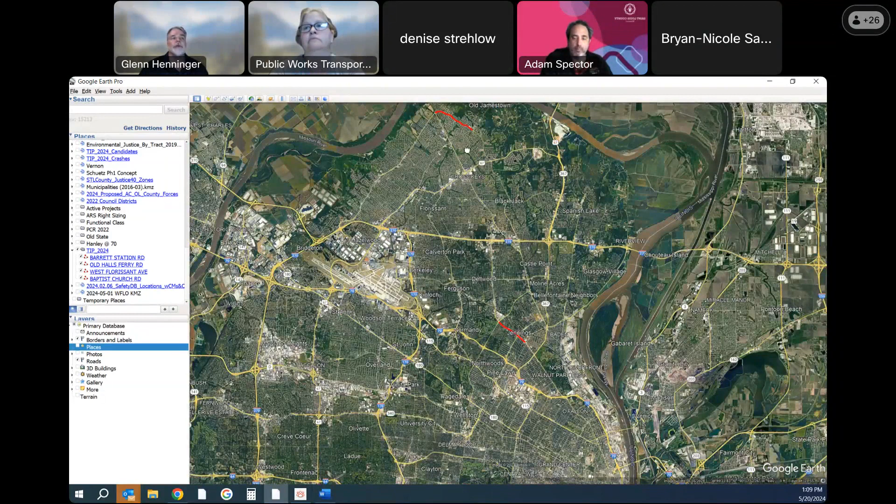And then the one project we did receive that has significant great streets components to it, it's on Old Halls Ferry Road, far North County. This is from the roundabout at Old Halls Ferry and Vale. If anybody's familiar with that, it's been in place almost a decade now.

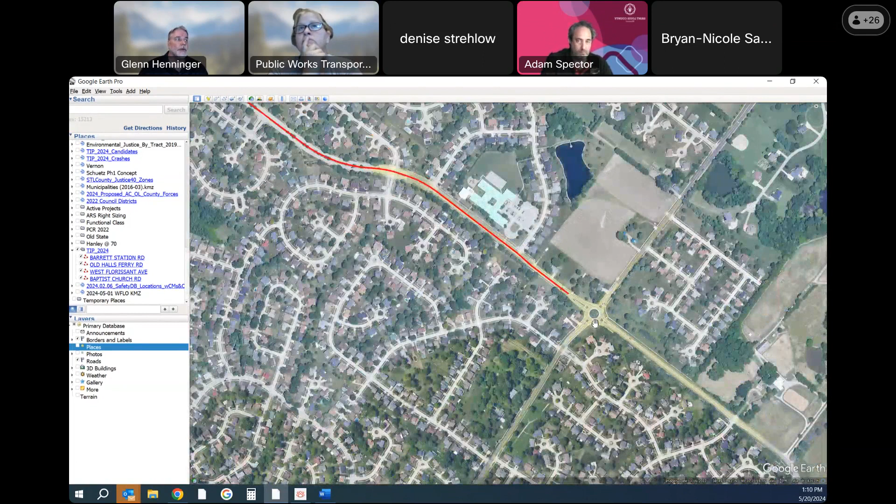It used to be a four-way stop, converted to a roundabout. As far as we know, it's been doing okay. Haven't heard any complaints. And then to the north of there, probably 3 decades old worth of a lot of residential development. Very built out area.

Our predecessors at the time of all that development had the developer build Old Halls Ferry as a 4-lane median divided boulevard type roadway. You can see the pavement needs in this street view, and that was just random. I didn't pick this particular location.

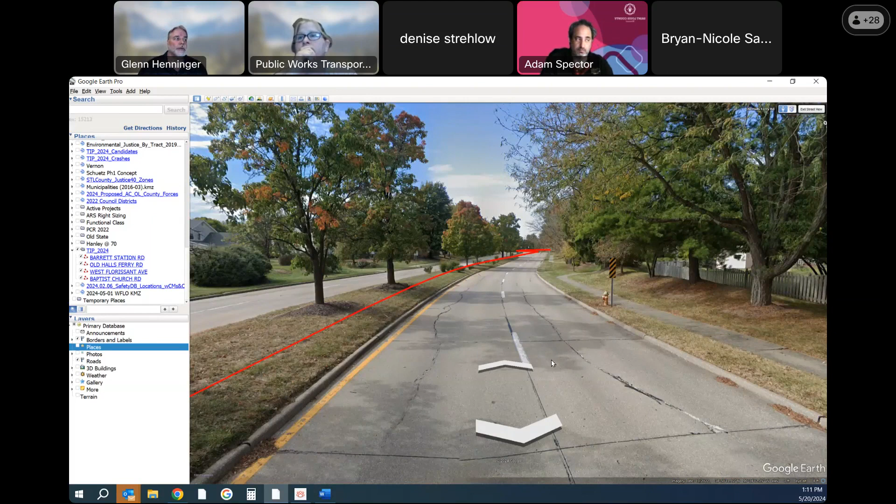What we have found is that they overestimated the amount of traffic all these homes would generate. The daily traffic is less than half of what would be needed for 2 through lanes in each direction. So what we have programmed is to reallocate the curb space for bikes. We're going to stripe it for 1 through car lane in each direction.

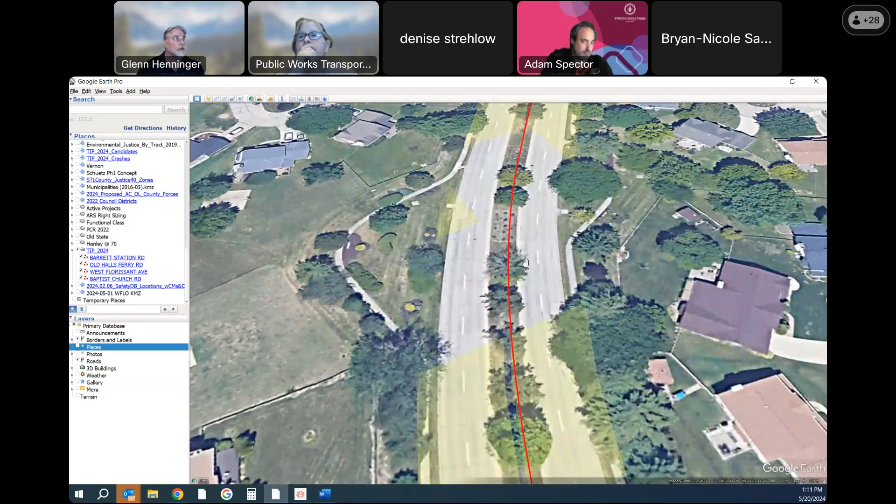It already has median breaks and left turn lanes at the side street intersections, so that's not an issue. And we fully expect it to run very well, traffic level of service wise, and should be a lot safer and slower.

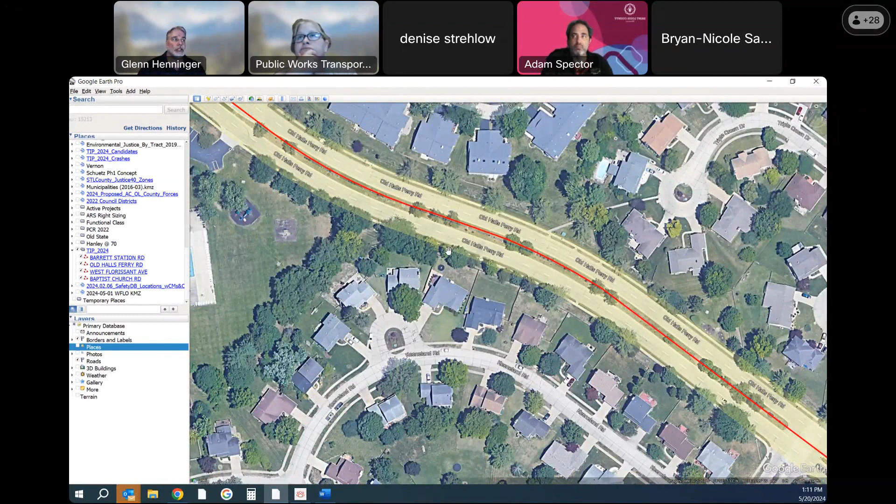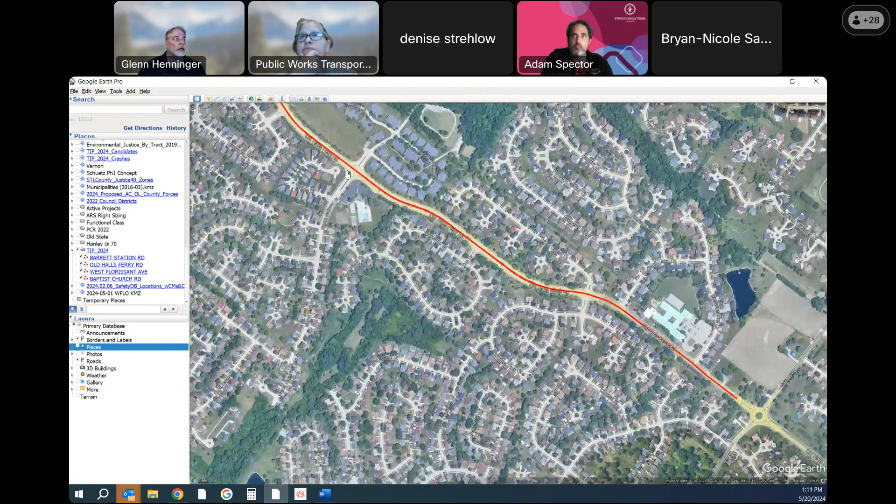That road that I pointed to the south end at the roundabout will go all the way up close to New Halls Ferry Road. We do have to open back up somewhat before that intersection, because large changes like this have to end somewhere, and that intersection is set up with a lot of extra space as well. We don't have good plans for how to continue the bikes from there. New Halls Ferry Road already has bike lanes, so that's not too much of an issue.

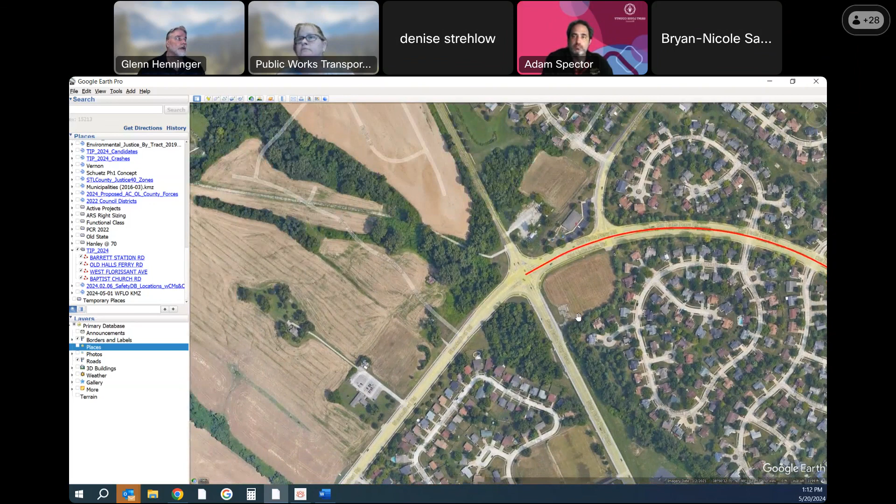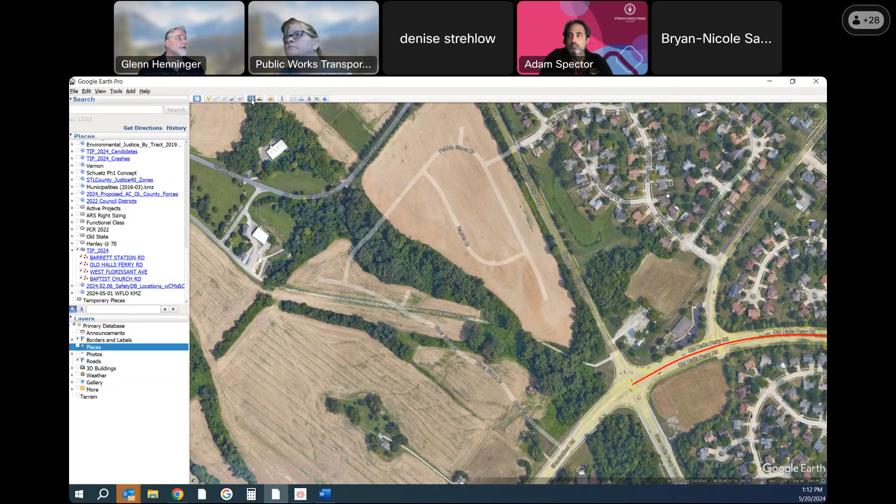Traffic wise, Shackelford and New Halls Ferry Road may have a little extra capacity where we might consider doing something similar in the future. However, if you look here, these white lines depict a new road of one of the final large tracts to be developed. That really doesn't show up in the current views on Google Earth, but if you turn on historical imagery, that brings up the latest image, and you can see where the subdivision is starting to take shape.

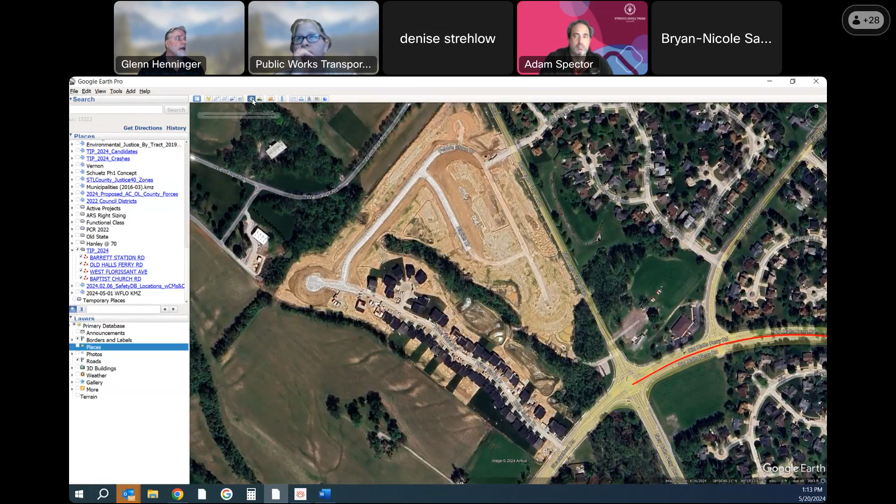And then north of that subdivision is a Boeing retreat, if anybody's familiar with that. It's gone unutilized for a long time. That has recently been sold to a Catholic university. Traffic patterns and volumes may change somewhat in the future in this area.

I don't see a whole lot of these new developments using Old Halls Ferry, so I'm still very confident it will be fine with 1 through lane in each direction. But Shackelford and New Halls Ferry, their traffic patterns may change, so we'll have to keep an eye on that.

This usually takes a little longer. We usually have more than 4 projects to talk about. So I will open that up for any questions on those 4.

And Misty, you may have to keep an eye out. I don't know, I don't remember if people are automatically muted. Correct. If you have any questions, you can put them in the chat and we'll be happy to answer them for you, or any feedback for that matter.

All right, so one thing that we had planned to fund all 9 of those projects. We had it in our budget. They were picked to fit within our budget. Since we only got 4 of them, that does open up some of our budget, which is good news for the next part of this presentation, as we will definitely be trying to make some use of upcoming funding.

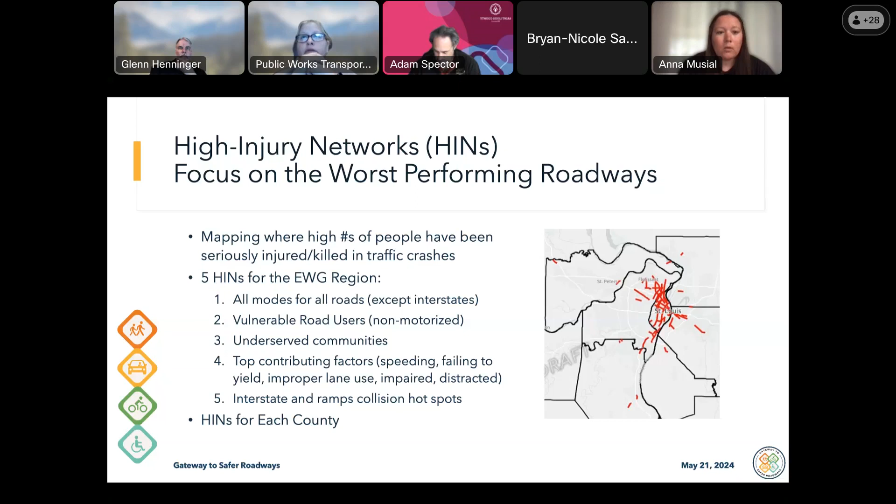On top of our regional high injury networks, we also created high injury networks for each of our counties so that they can look specifically at their county to see what can be done on their own networks. This is just a sample of an early screenshot of our high injury networks.

I didn't have time to get the most updated one, but the red on this map shows where the top 10% of our fatal and serious injury crashes are happening in this region. The orange is the top 25%, and the yellow is the top 50%. In our current map, we took the blue lines off since they showed the bottom 50%.

Some of the data behind it, we just didn't really like how it was working, so we took the blue lines off of our regional maps, but we left them in our county maps. When our plan is final, we'll be putting this regional high injury network on our website so the public can access and use it.

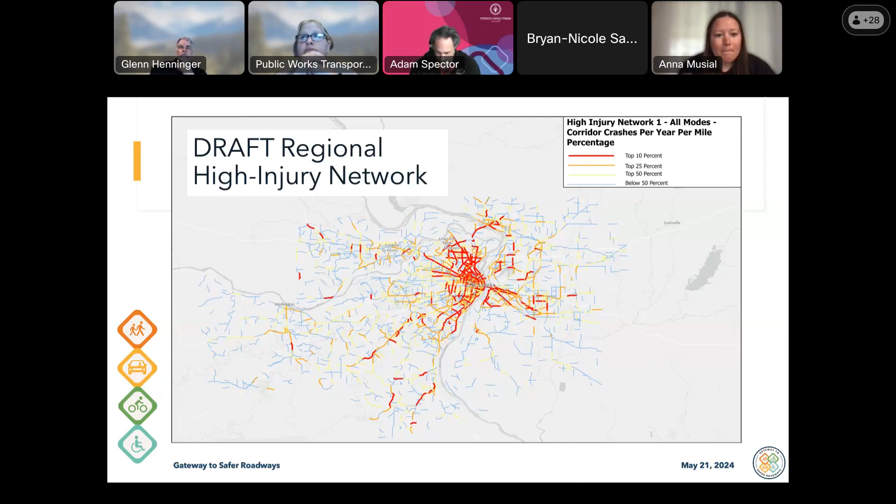We dove a little deeper into the crash data and looked at systemic treatments that our locals could deploy on their systems to help reduce fatal and serious injury crashes. We identified high-risk roadway characteristics and what countermeasures could lower those risks. We also focused a lot on intersections, roadway departures, VRUs, and speed management, and many of these countermeasures are part of FHWA's proven safety countermeasure list.

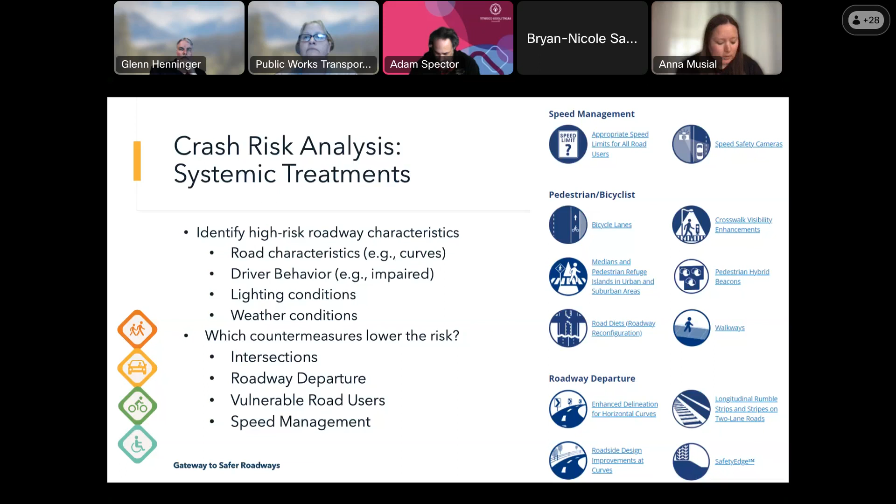The last component of our plan was the policy review. We identified 9 policy programming needs and opportunities for our region, listed in no particular order: speeding, seatbelt use, helmet use, distracted driving, impairment, red light running, bike ped safety, unlicensed drivers, and roadway departures.

To help address those 9 needs and opportunities, we came up with 16 policy and program recommendations, divided into 4 categories: safe road users, safe roads, safe vehicles, and enforcement.

I'm not going to go through each of those for the sake of time, but we took all 16 of those recommendations and mapped them out against our 9 areas of needs and opportunities, to show that just one of these recommendations could possibly hit all 9 of our needs and opportunities. So we can really address a lot of our issues by doing just one or two of these programs or policies.

We also wanted to make sure we addressed the great work already being done in our region and try to build on it. For example, in St. Louis County, the city of Kirkwood had already completed an action plan and is doing supplemental work for it. Webster Groves is also going to be developing an action plan — they received SS4A funding last round.

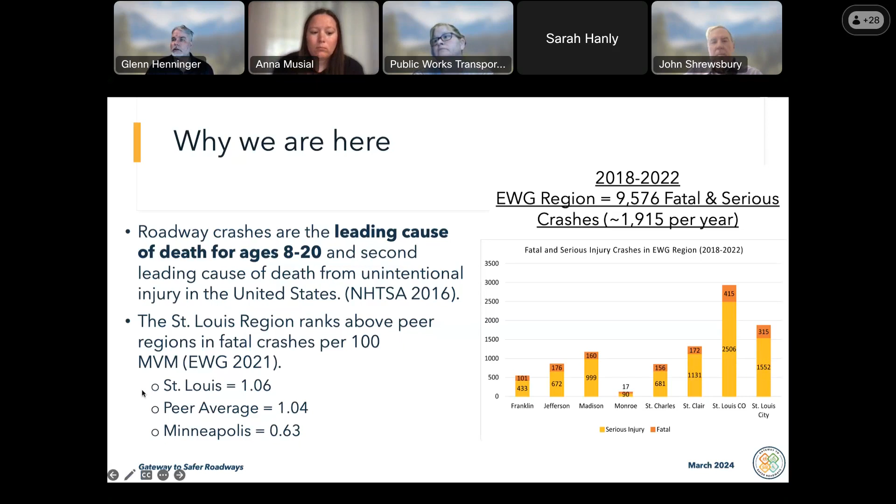For all of our crash data, we used crash report information — any data we got was collected from crash reports, and that includes the vulnerable road user data. So I wonder if you're capturing the cyclist and pedestrian crashes — are they reported? The only way we can analyze it is if it's reported. Unfortunately, I know a lot of them are not being reported, but there was really no way for us to do otherwise — we had to have a common way of looking at all crash data throughout our whole region, by state and by county, though by state is the hardest part, but we had to have something we could relate back to, and that was the crash data.

So who reports crash data? The police reports — so if police don't show up to a scene, then it doesn't get reported.

And my experience with the police as a cyclist is that I don't know anyone who's ever been in a crash where a car has been ticketed. So it strikes me that their attitude is it's a no-fault collision.

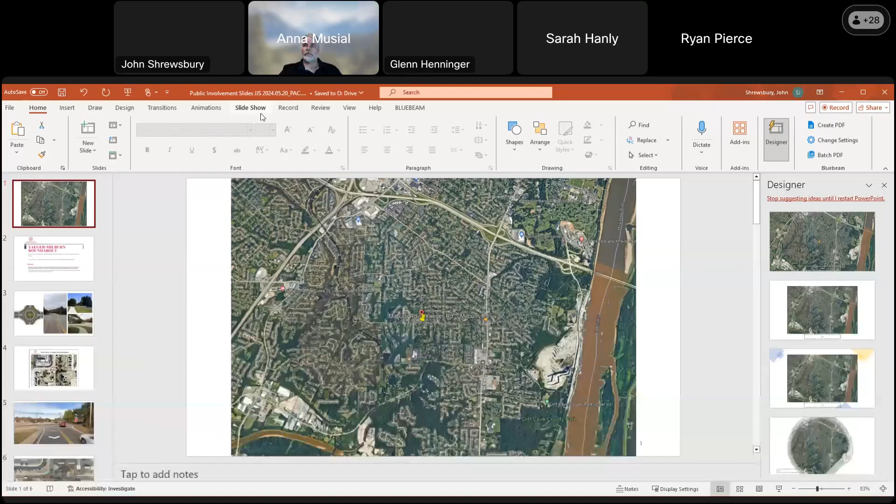Is that better? The Yeager-Milburn intersection is in South County. You can see highways to the north, that's 270. On the west side is I-55. You've got the Mississippi River to the far east, and the Meramec River down in the corner. Yeager-Milburn is in the southeastern part of St. Louis County, near Oakville High School, just north of the high school, and there's another elementary school right on the corner.

Over the last few months, since our last meeting here in November of '23, we've had quite a number of design projects with public involvement and public engagement meetings. On Yeager-Milburn in particular, we've had at least three meetings with the public—some with the school, the property owners, and the general community—since last November. Then just last Monday, we had another public meeting and presented this project to them again.

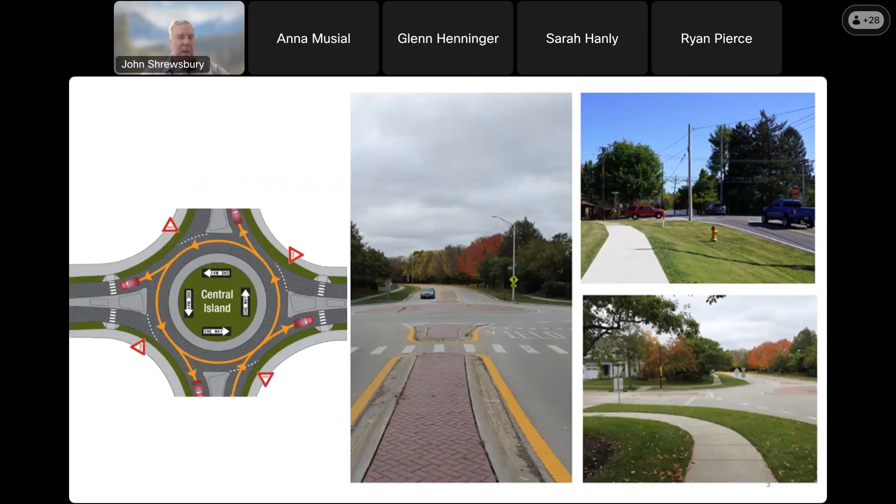There, at this intersection—this is just a generalized roundabout photo I'm showing right here. You may be familiar with them, but I don't think the concept is very familiar to the folks down in South County. They're not quite accustomed to these things, and that was a big reason why we've had a couple of public meetings with them to help explain.

At this intersection, there were 48 crashes with 10 injuries in the time period of 2017 to 2020. The county got some federal funding through East-West Gateway—congestion mitigation and air quality, CMAQ funding—to help improve the operation of traffic at this intersection, at this location. So, like I said, we had the meeting last Monday night.

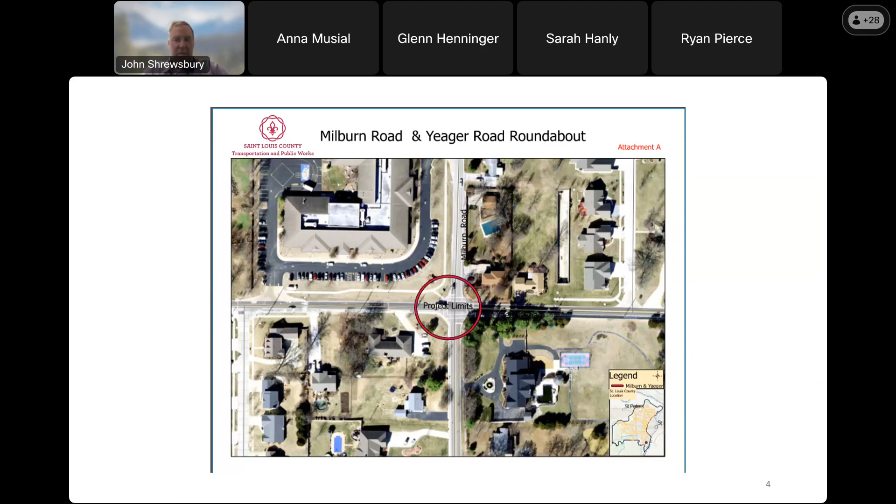There were around 120 to 140 folks at the meeting. We talked about this intersection and showed them a lot of graphics on it.

We gathered comments from everyone that attended. There was about 61 that were against the idea of a roundabout, 25 in favor, and 4 that were somewhat indifferent to it. Our councilman Trakas down in South County has asked that they provide feedback, noting that it is totally up to them if they want to proceed with this project or not.

It's a proven concept. It improves safety quite a bit. It reduces the number of conflict points between vehicles as well as pedestrians, and improves safety quite a bit over what we have now, which is a 4-way stop controlled intersection that is routinely disobeyed. And therein is the problem.

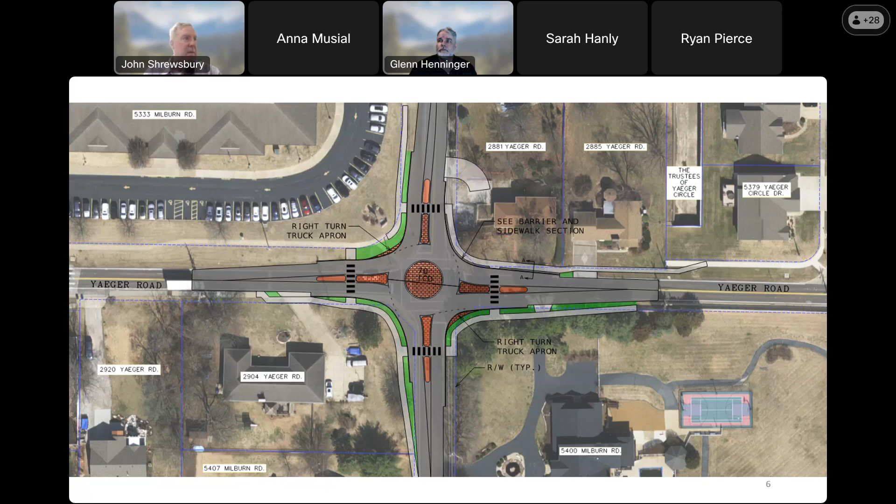There were a couple questions in the chat, John. You could address those, please. Trying to get back to my screen. Sorry. No, you're fine. And if, for that matter, I can just read them to you if you'd like.

The question comes from Jason Hartsfield. Are you going to use any kind of barrier to keep pedestrians from just walking through the roundabout? Because they will absolutely do that.

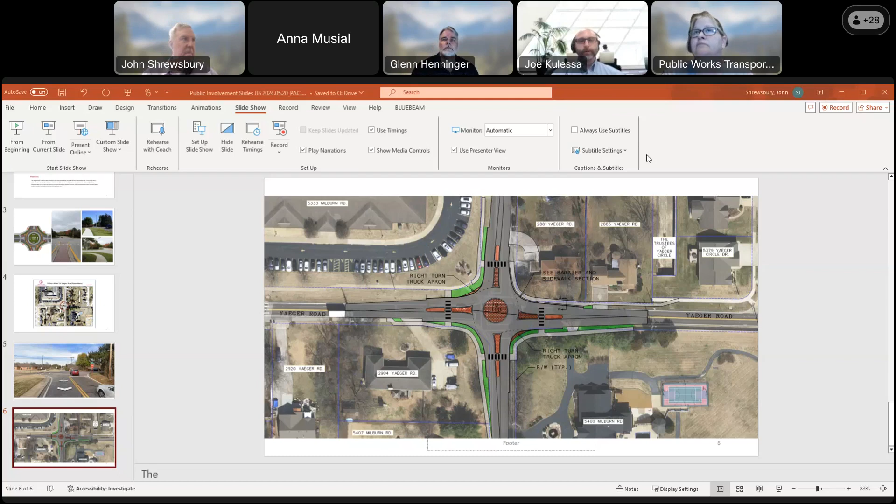Hey John, I'd like to suggest Joe chime in, I think he's a little more familiar with the latest design. Sure. Thanks, Glenn. So in this particular roundabout, there won't be a barrier that keeps pedestrians from walking in locations other than the crosswalk. But realistically, that is going to be the case with any roundabout.

However, we are introducing raised crosswalks with this design to slow vehicles as they approach, and this is actually a mini roundabout design. The center island is designed such that school buses can get around it without driving over the island. But if we had a large delivery truck or tractor trailer, they can still navigate the intersection as they do today, but they will have to drive over the raised center island that's in the roundabout. So that's an answer to both of the questions that were just posed.

Todd Antone asks, what happens next if the public vote is against the roundabout? The project will be canceled, unfortunately. We will look at some of the considerations that have been brought to us by the public and make a determination as to what we do next. I don't have a definitive answer to that yet. What I do know is that the federal money will no longer be available. And this intersection, as we move forward for safety funding, while it does have a high crash rate, it does not rank on the new East-West Gateway Vision Zero model as a high injury network location. So it most likely will not be pursued with the same size of program if we go to look at something else.

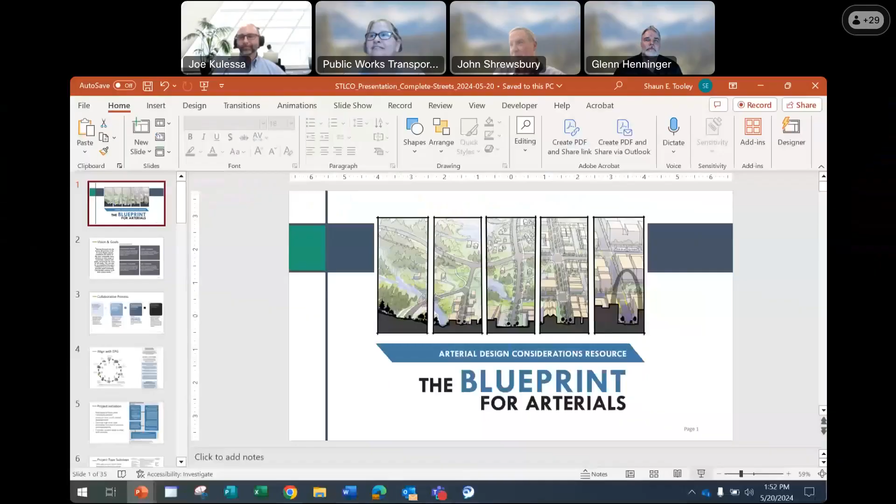Thank you, Shaun. Hello, Shaun Tooley, Missouri Department of Transportation. We at MoDOT have been working with East-West Gateway on this new resource for the region. Several folks on the call, like John Shrewsbury, Joe Kulessa, Glenn Henninger, have been involved, also Ray Golick. This new resource will be done in the next month.

It's effectively a design guide, but it's actually more than that. We can't call it a design guide because we're not replacing the Engineering Policy Guide. We're supplementing it. It's a resource to help governments like St. Louis County, MoDOT, St. Louis City, et cetera—actually the 5 counties in the region—who own and operate arterial roadways like Big Bend, Brentwood, Manchester, Olive, to walk through a more detailed process during the conceptual phase.

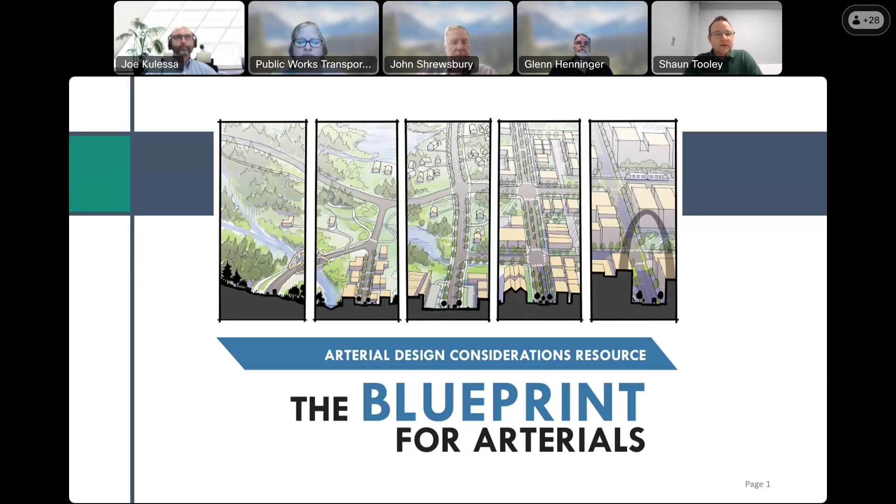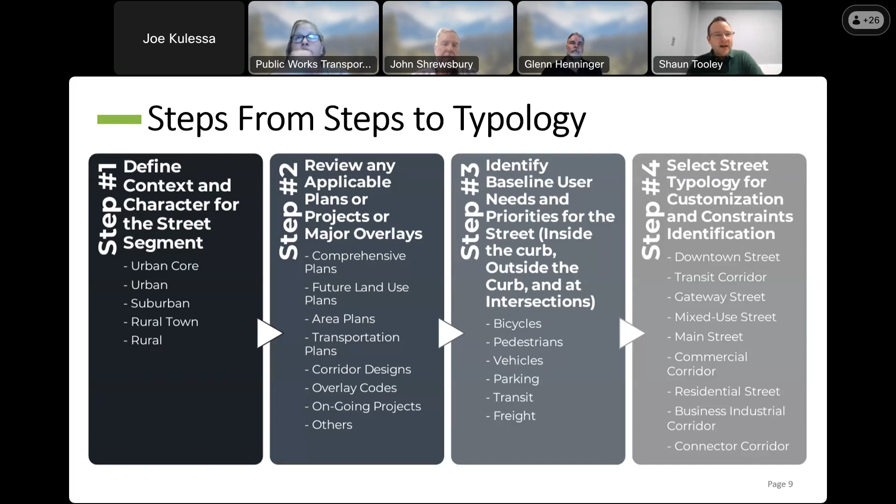And then we say, what are your existing plans? Some plans—let's say Woodson Terrace, Woodson Road wants a road diet on Woodson Road, a MoDOT roadway—and they developed their own conceptual plan for that. Well, how do we need to pull some of that and evaluate it for our agency's study of that roadway in the future? Who's our user? Those plans, your bike-ped plans, your comprehensive plan, often tell us who your users are because you have that analysis in them.

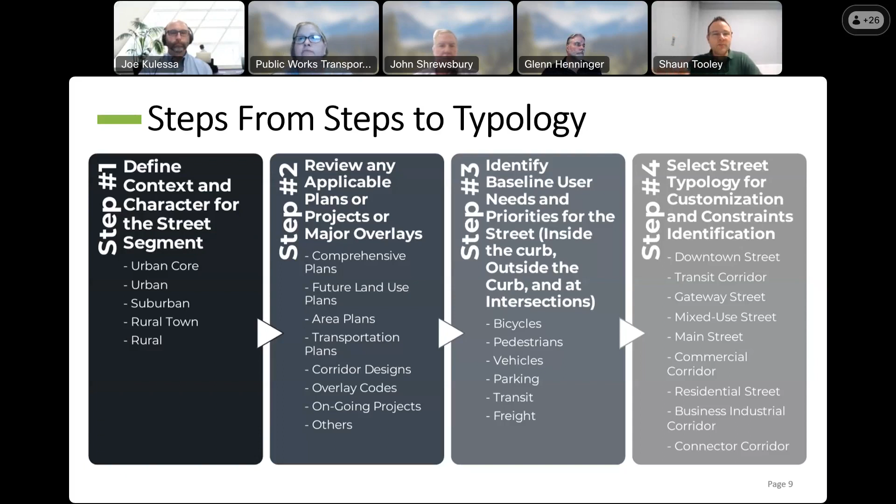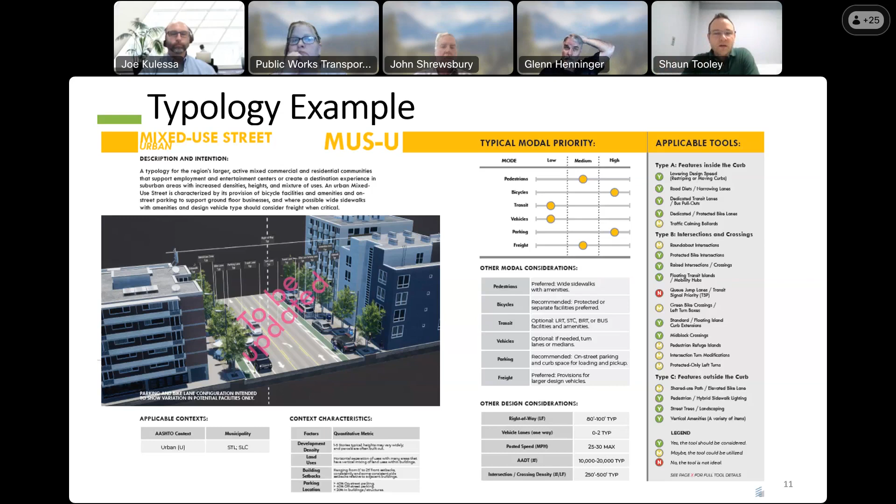For mixed use, you see red for queue jump and transit signal priority. In mixed use, you may only have 40 feet, and you have to decide who gets priority. Your highest priority is bike and pedestrian because you need that foot traffic to generate business, and with a lot of foot traffic you might need that parking instead of, say, a bus lane. So we try to give advisory guidance there, as well as who your modal priority is.

It's all the same road to us because it's Route 231, even though it has 3 or 4 names, and then it becomes South Broadway. We actually broke it out into 4 segments and said, here we can get a bike lane, here we can't for these reasons, here we can get parking on the road, here we can't. That segmentation by typology helped guide our design decisions.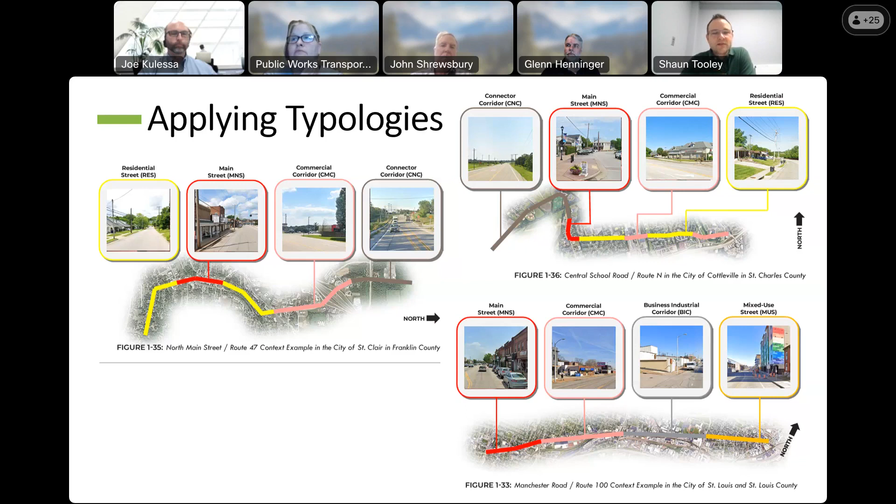And lo and behold, the public helped us through those design decisions as we were presenting the information to them.

Then the great reveal is which typology goes with which county. On the top you have your AASHTO context categories of rural, urban, suburban. On the left you have your typologies. In the cells you have the code that goes with them, as well as which county goes with them, to the best of our ability.

We actually ask you all, project teams, individual jurisdictions, to work with us and with your own folks to say, is this correct? But because we have to get this done quickly, we're not able to dissect every stretch of roadway in every county to be perfect. So project teams, as you go through the decision-making process, go deeper and debate which typology you are and which solution is a better fit for that typology.

So then we ask, what solutions are we considering? There's a bunch in this chart, and we're not going to have all of them in our design guide, so we had to pick and choose which ones are aspirational. Many of us know how to put in a center median, rumble strips, or a shared bike lane. But we might struggle putting in a roundabout, which we do, or vertical separation for a bike lane or a pedestrian refuge island - there's not as much experience doing those. We've done very few of them, if any.

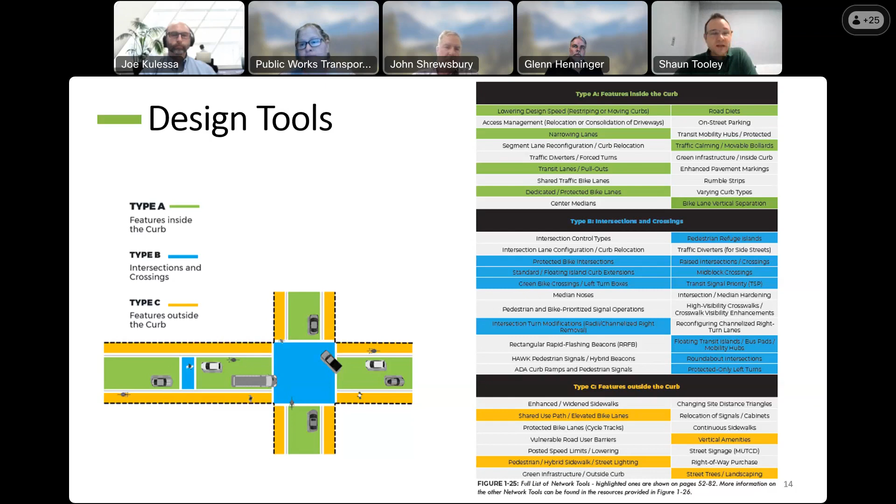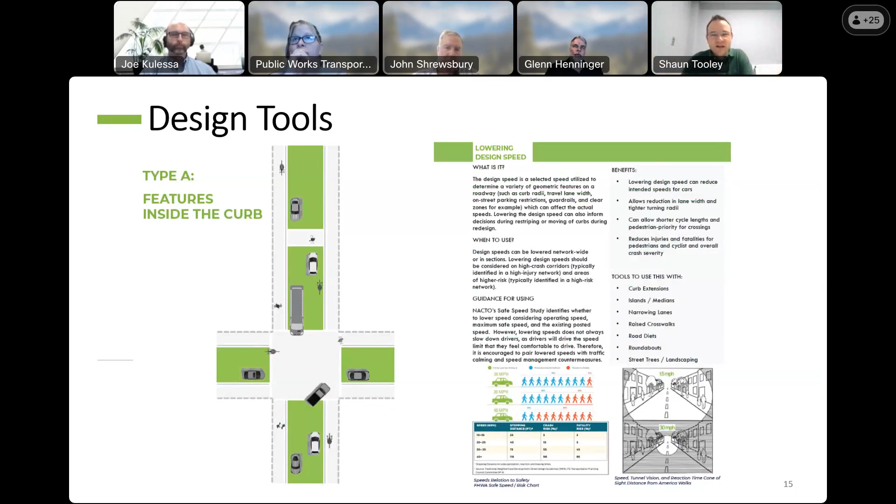So we had extra pages in the document where we put that in there so you can cut that sheet out, put it on a foam core, and take it to a public meeting, because you're not going to print out the NACTO version or the 10-page AASHTO guide version. You need just 1 to 2 pages to show them, so we created that for the aspirational solutions.

So I'm kind of skipping through a few. Yeah, use my time wisely - no more than 10 minutes.

I want to emphasize that we're all in this together. I know the roundabout in South County was just kind of poking fun, because we're all going through that right now. We've only done a few projects in this new way of doing things, and it's very much learn as you go. We've definitely had to change practices in order to see projects retained in the last few years. We don't know how we're going to roll this out yet for coming years and projects, but we now have a resource to help us make better, and hopefully safer, projects.

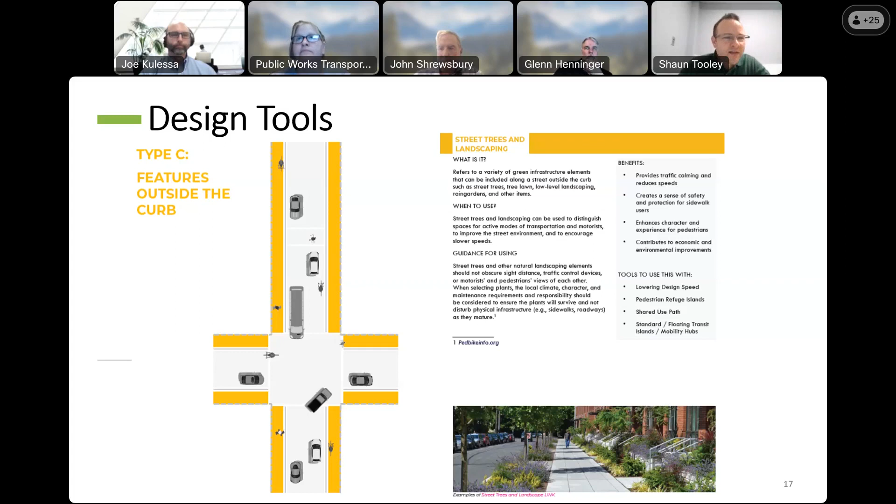I think I saw some questions, so I need to stop sharing. There's one there, Shaun, that maybe you can respond to.

The question is about a strategy for developing a more universally designed roadway.

Universally - I don't know if I can comment on universally. I think we're trying to emphasize that your design is based on context, and you design for your user and for your place type. So there's not a one-size-fits-all. It's more of a kit of parts to help guide you through a decision-making process so you get an outcome that's more supported by your community, but also one that you can keep as a project.

I see something about Kings Highway - that's the city. Oh, Charles, you're making a point here that they should have done community engagement first. Yeah, they're struggling too right now - saw that in the news.

Other questions? I know we have other departments on. Thank you to Parks and Rec for being here.

Imagine the health department's on. Okay, well, any other questions from anyone? Put them in the chat, or we may have to move along here.